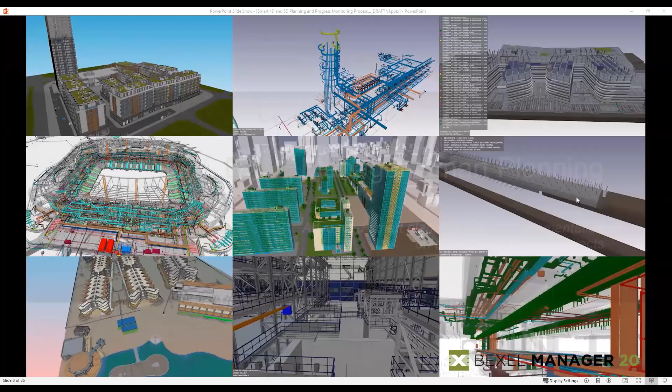Maybe the plants and the metro projects, tunnels are slightly different because some of the zoning is done in a different manner, and of course the methodology for construction is a bit different. In this case, we are going to talk about data integration and metadata checks. So Bexel Manager is IFC certified by buildingSMART.

We fully support IFC import and export, fully support also BCF, and in those data checks you will see how you can literally, based on data requirements and data specifications, integrate the requirements into Bexel and automatically perform various data checks. In this case, we are going to talk about Excel as a source of the rules, but also JSON, which is

literally a month ago, we within buildingSMART discussed information delivery specification, published the first document for JSON, and we immediately integrated this. So we hope that the other solutions will also follow us and use this JSON. And not just hope, but we already know that there are some others. So it will literally allow us to use the data checks from Bexel in any other application, or conversely, to use data checks from other IFC solutions in Bexel. So it really helps the users to be much more flexible.

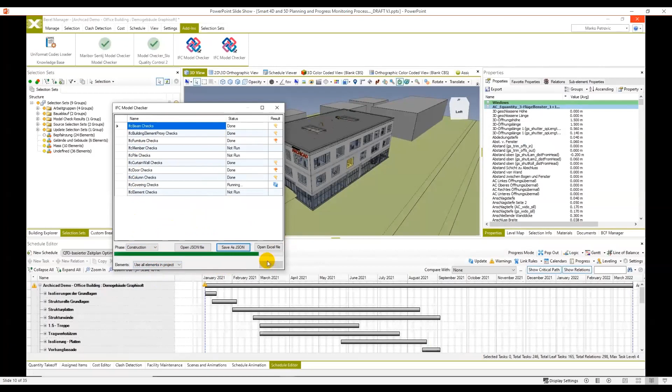Of course, essentially why we are developing this is that we can load that checklist, choose the phase of the project, let's say in this case the construction phase, and run the data check for all elements or just particular elements. And in a couple of seconds, you see that all selection sets are generated, which is fully customizable.

And you can on the left-hand side see all those checks when the check is performed, and you can easily, in this case by using BIM Collab as a collaboration platform or file-based BCF, automatically send them to the designers and other stakeholders on the project. So essentially they can see which properties are missing and so on.

Why this is very important, and why we always start with clash detection and data checks, is because otherwise, if the properties are not there, let's say we can calculate the areas and volumes of certain cost items, but maybe properties are not defined. Or let's say we can create the schedule, but building levels are not very good, or any other property. So in order to start further analysis, we need to first check if the models are okay.

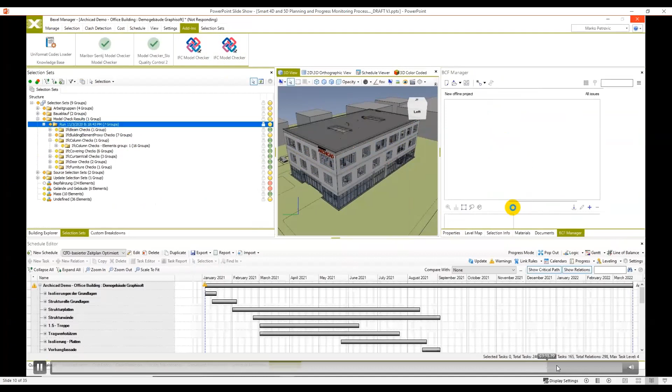And I have to say that just this feature helps a lot, especially designers. There are some projects where literally months and months of manual work of engineers are now optimized by using this flexible data check system. So this is not just related to the properties. It could be much more complex in Bexel Manager. So let's say we can check if the windows are hosted by walls,

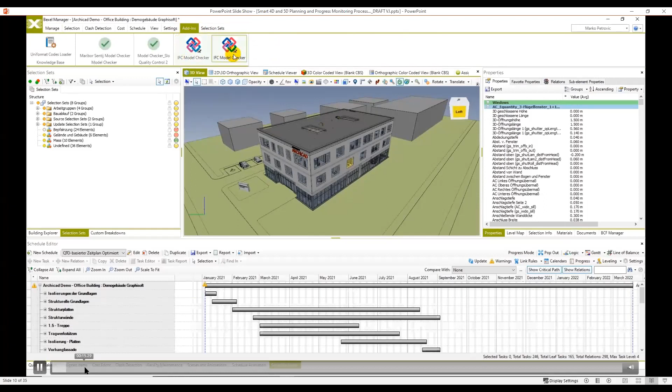or we can, as you will see later, combine the cost schedule information with IFC. So very interesting analysis can be automatically done in Bexel. So as you can see now, the user can just log on to the cloud and send this to, in this case, BIM Collab. What is also very important is the ability to move forward with the data checks.

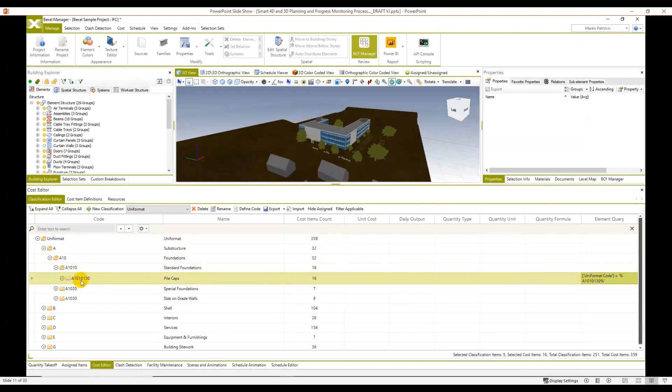When certain data checks are defined, what is also very interesting is that based on any knowledge base we already have, we can teach the system how to automatically enrich the model with new properties. So in this case, let's say there are uniformat codes, and this is Excel. As you know, Bexel is very open, so you can easily import and export data in any open format. So now from Excel, you're loading a cost database. This is not just cost information, you have all resources defined, but what's very important is you have formulas and queries, allowing Bexel to automatically create cost estimation.

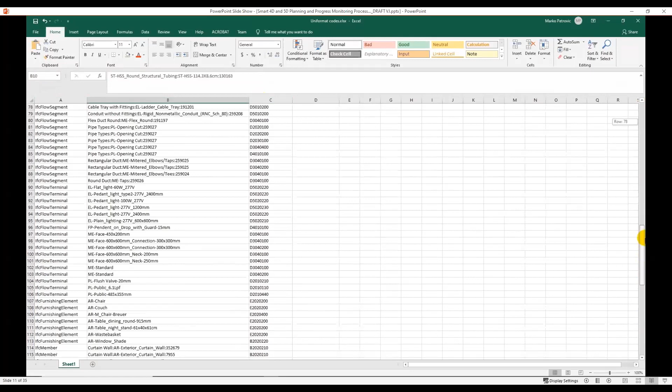So this is much more than just a simple cost estimate. The problem in this case is that certain properties like MasterFormat or Uniformat are not properly defined. With some additional simple add-in, we are loading a knowledge base which tells us which code has to be attached to a certain IFC entity and object type. If we use this on one project, we can easily use it on any other project and enhance this database. This is just a simple example - this could be much more complex and additional properties could be added.

So the workflow is the following: you just load this uniformat code loader, so even if the designer hasn't done this before, it automatically attaches the codes to each single element. Then if you have the cost databases, which in this case uses uniformat classification, you can literally in a second perform auto-assign and calculate the cost. So now you choose auto assign cost items, click OK, and when you do that, you automatically have the entire cost.

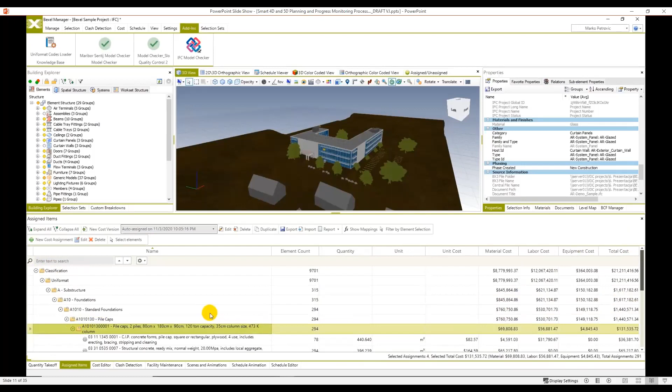So the workflow goes like this: you load IFC files, you don't have properties, you don't want to spend so much time manually working in Revit or any other tool. So what you are doing is loading the cost information and properties directly using this small add-in called Uniformat Codes Loader. As you know, you can develop those add-ins - there is huge documentation on our website and Bexel user area on how to do that. Our experts and developers could help you, and the entire process is straightforward and could be reused on any future project.

What is also very important now to talk about is efficient use of available data. So what is the point at the moment? Designers spend so much time to properly develop elements, categories, object types, families, buildings, everything, and we unfortunately do not use this efficiently in the construction stage.

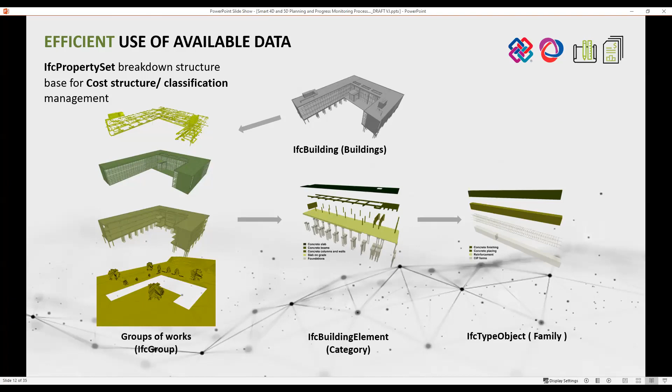So as you can see here, for example, for zoning and planning of the project, we could use IFC group, IFC building element, IFC type object - literally use all the elements and properties we have in the integrated model and automatically create very interesting analysis later. So you have this very interactive system in Bexel, and you'll see how you can literally create any cost breakdown structure, any classification based on the needs. The system is very flexible and can handle completely different projects.

You see how, by using properties which are already defined, you will have the full preparation for the cost structure, and later you will use it in the methodology. So how the system works - in this case we are loading just 3 IFC files. This is an Autodesk Revit sample project, so we are using IFC.

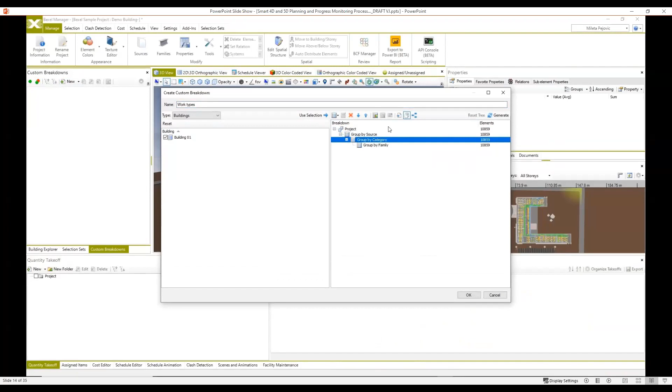We also have a direct link with Autodesk Revit, so an add-in. We are now creating, based on those models, a custom breakdown structure, organizing the elements by source, by category - this is a quite small project, let's say 11,000 elements. Bexel can deal with much larger projects, as you'll see a bit later. And now when you click OK, the system creates a custom breakdown structure where on the left-hand side you can see a color-coded system. So the elements are organized according to the source, then according to the category, and in this case according to the family, or in IFC terminology, IFC element entity and IFC type. So in a couple of seconds, you can create a custom-based classification, color-coded system, so you can visually check if everything is done properly and okay.

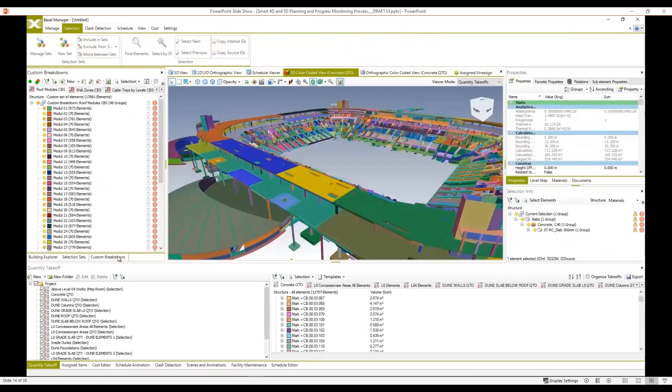This is a bit larger project, a football stadium for the next World Cup, and again custom breakdown structures are used, and that's how, for example, phases of the steel roof construction are analyzed and defined, and of course could be used later for 4D and 5D simulations. This is MEP utilities organized in this case by building levels, so we can literally query and customize the breakdown structure in the way we want.

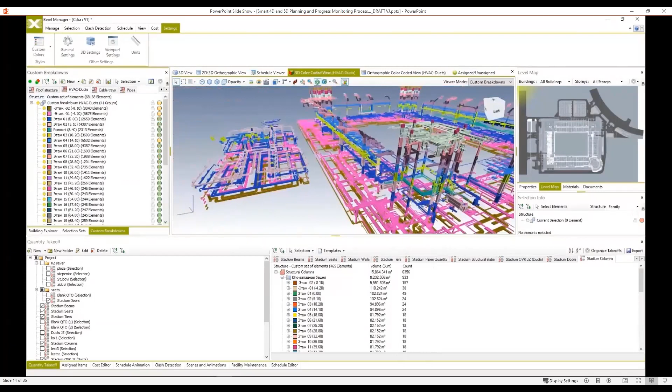This was for the previous World Cup, the project in Moscow. So we have an idea that Bexel is used for all World Cups, and this is the analysis done for the football stadium in Moscow.

Let's move forward. Now the idea is how the cost system is developed, what is very important. Of course, all those videos will be sent to you, and webinars. So what is very important is that Bexel is a very flexible platform.

In this case, you can use Omniclass, Uniformat, Masterformat, Spanish BC3, German DIN 276, CoClass, hopefully one day the standard in Europe, NRM2 or SMM7, NATSPEC, Australian based, and you name it. So literally Bexel is very open in this way.

And in this case, you can see that exports could be in BC3, which is Spanish and also a standard used in Latin America, and GAEB, which is the German cost standard.

So when the BIM cost classifications are defined, and every item has cost information, but also a BIM query and formulas, Bexel could automatically generate the cost, and then by using intelligent construction schedules, create very accurate 4D and 5D simulations. You can compare different versions, export to Power BI, and we'll show you a glimpse of that today as well. So this is one way how you can organize the methodology.

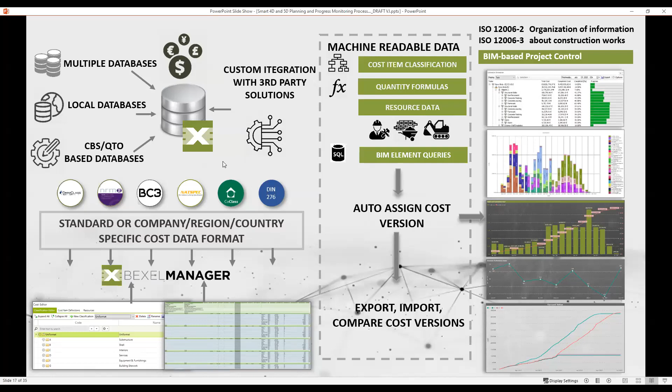Just to mention that Bexel has a desktop and a cloud-based system, so you can use our common data environment if you are working in a team, or if you are a single user you can use a desktop application. Sometimes, especially when dealing with a very large quantity of information, it is very good to have data on your desktop, because cloud-based solutions are very good, but sometimes performance struggles a bit, especially on large-scale projects.

What is also important is that Bexel could be hosted on any premises. It could be Amazon, could be Azure, could be our server, but also, what is very important, client servers and client premises as well.

So there is a question. Can I put... yes, maybe you can. The question is about Dutch standards.

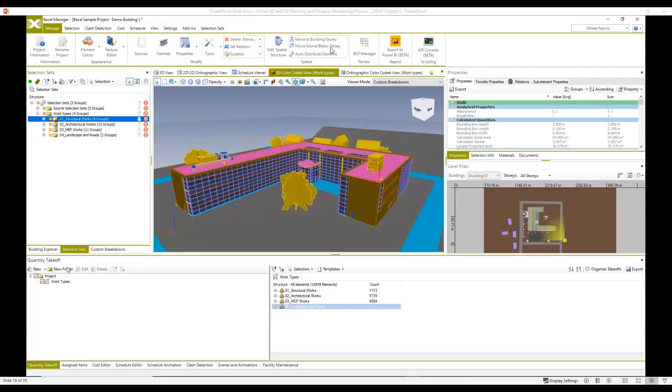There are our partners in Netherlands, and I think they already integrated some work done with Dutch standards. I saw on one presentation recently in a competition in Netherlands that they used the Dutch standard and classification integrated into Bexel Manager. What is very good is that it's done by the experts in Netherlands, so we didn't even know what they were doing. This is an open, flexible system that allows users to really do everything by themselves.

So this is the way how the quantity takeoff is generated. We chose here different selection sets, so architectural works, structural works, and based on that we automatically create - group by category, group by selection sets, which are previously defined. Then the third parameter is family, could be building level, any property you have in the system. And we are adding here properties like volume and area, and the system automatically creates the quantity takeoff.

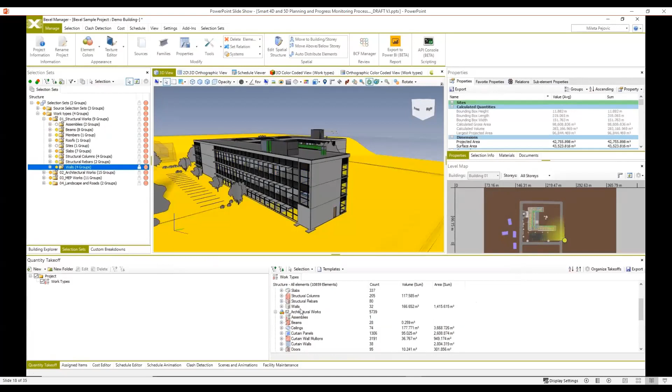So when I isolate any of those elements, I see visually where those elements are in the project, and I see all the quantities. Of course, this is not enough for professional bill of quantities, but Bexel could be a good basis for this.

There are a lot of elements for which you need more specific formulas, such as reinforcement, formwork, and so on. Based on this quantity takeoff and the defined outline level, which could be customized in Bexel, you can literally in a second automatically create a cost classification. And with this cost classification, if the user has defined even the cost in the BIM family, you can automatically have the cost as well.

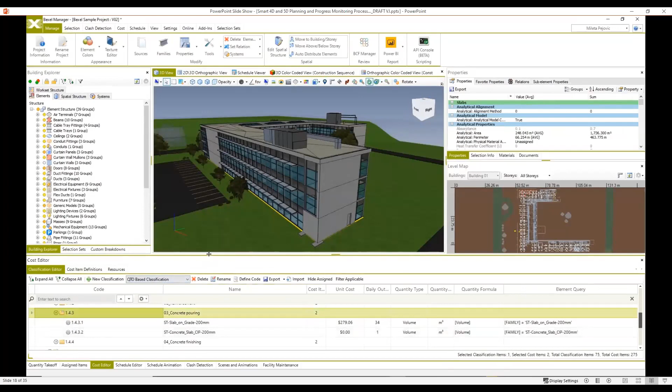So with this cost classification automatically generated, and if you add certain costs or resources, you can have labor, equipment, materials - these are various cost databases used. I think this one was from Spain.

You can literally change the formula, so it's not necessarily just a property. You can set, okay, I will include a waste factor, or for formwork use the property reinforcement as the density of reinforcement. And when it's done, the system can automatically create a new cost version.

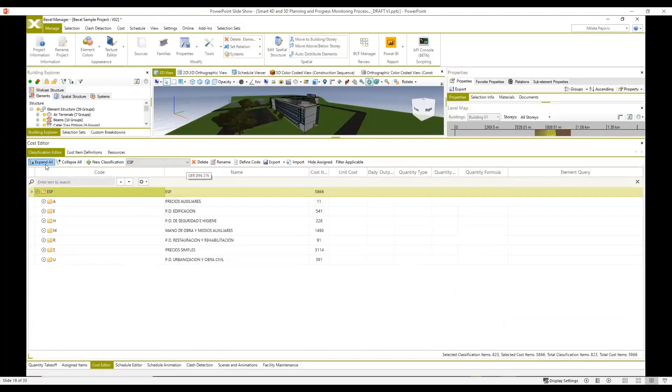You will see now that those cost versions are very, very detailed. In this case, you see Swedish AMA standard, the German standard, Spanish classification. So as you can see, you can use really various classifications in Bexel Manager. We hope in the future that it's going to be a bit more unified, because this is part of digitalization, so standardization is very important.

Now when we have this automatically calculated in Bexel Manager, whenever we isolate certain elements, we see just the cost of, in this case, architectural works. Or opposite, when we select the elements in the BIM model, in the cost items, we can see to which elements those classifications are connected.

This is another classification my colleague will later create, based on this IFC-based classification, which is quite innovative again. Why? Because you can use this literally on every project in every country. So if you are a multinational company, you can easily deal with this, and the calculations and analysis work very well because they are based on ISO IFC standard.

So now this is an example of how you can define the properties, change the volumes for the quantity types, units. Usually it is predefined, and just maybe for new cost items this has to be enhanced from time to time.

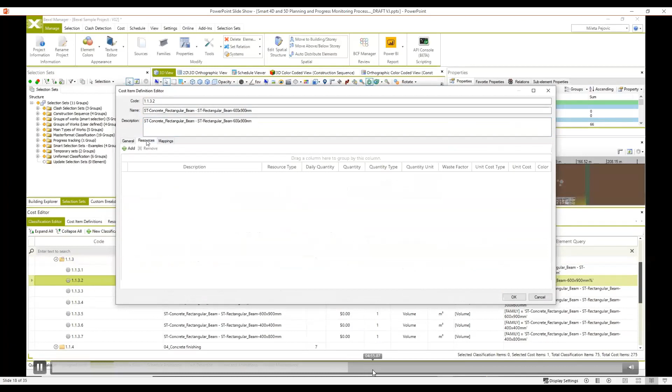The benefit of the Bexel integrated system is that whenever I change the price of the concrete, let's say because it is increased due to change of the market, it automatically changes the cost of all cost items related to it. So that's why it's important to properly have defined cost databases.

Then you can use what-if scenarios, all bids are happening, and if somebody is giving you different prices, you can see how the prices are differentiating among each other.

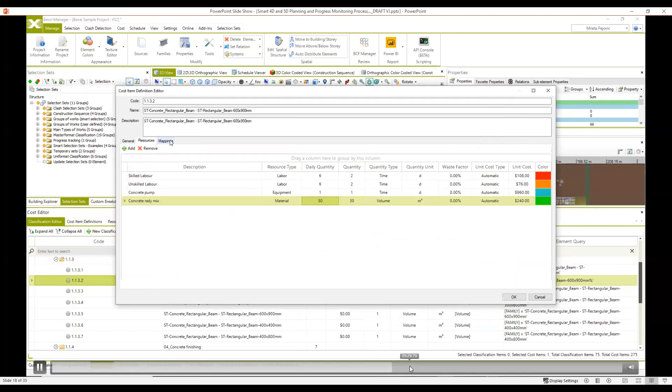Just to move forward, this is how formulas are defined, and when it is done, you can literally assign those elements to the project and see how the total costs will be automatically calculated, because again we are using quantity formula and element query for this.

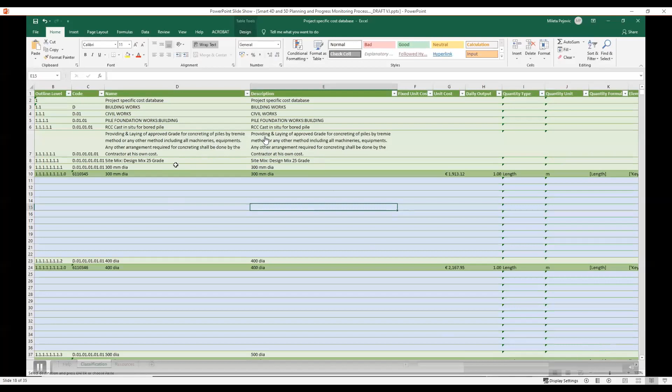Just to move forward, this is an export into Excel. It's a fully open approach, so all cost classification you can import and export into Excel or any other format, so you can reuse it.

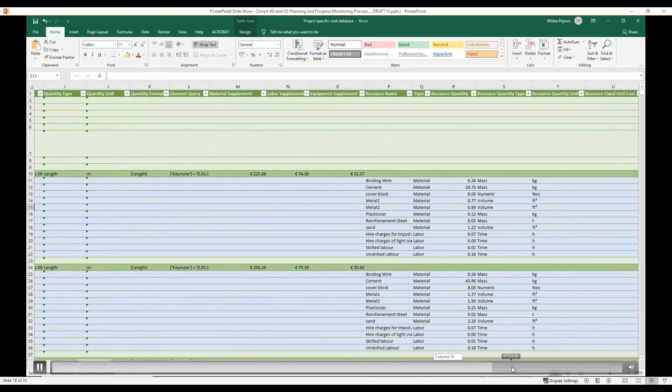There are very large contractors around the world which use this for integration with SAP system or other ERP platforms. This is very important, because we know that we are not going to solve all the problems, and collaboration is of course very, very important.

So just to see, there is okay, no questions, great.

So this is the way you are importing and exporting cost information into Bexel, and when it's imported, you can also automatically calculate the costs for all elements.

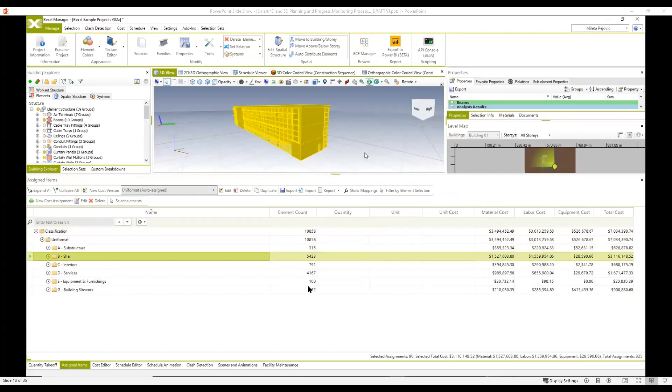As you can see now, this is not the QTO, but really bill of quantities with all cost items which don't necessarily exist in the BIM model. So you have a cost of formwork and reinforcement, although those elements don't exist in the BIM model, because you apply the formulas to other elements which exist in the project.

Let's now just move forward. What is also very important to say is that we are supporting 5D. This is an open standard for cost IFC import and export. We believe this will help for collaboration with other platforms, so it could be a common exchange format based on IFC for exchanging cost information between different platforms.

So you can have a cost version or schedule. Also here, what is very important in this cost schema is that it is always related to the element. So this is not just an Excel spreadsheet, but there is also a rule-based system which allows users to know actually to which elements the certain calculation is made.

Okay, costs which are not in the project, how do you... okay, QTO takeoff does not show the levels as per spatial structure, also assigned items. Even the dates in Excel are not in the date format, the small correction is very much needed. Okay. QTO does not show the levels. Okay, to be honest, could somebody clarify this question?

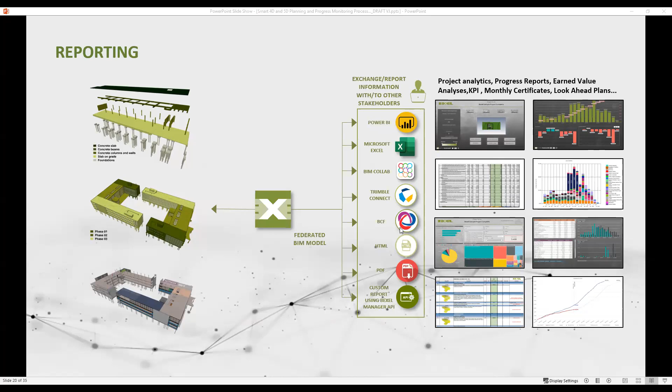Okay, having all this IFC, can you generate the schedule directly? Yes, yes. So we will show you today how this could be automatically generated. I just wanted to show you one example, but maybe I would ask Alex to continue now with the explanations, and then at the end I will show you an example with the Power BI reports, but the progress has to be entered and the schedule generated. So Alex, could you please?

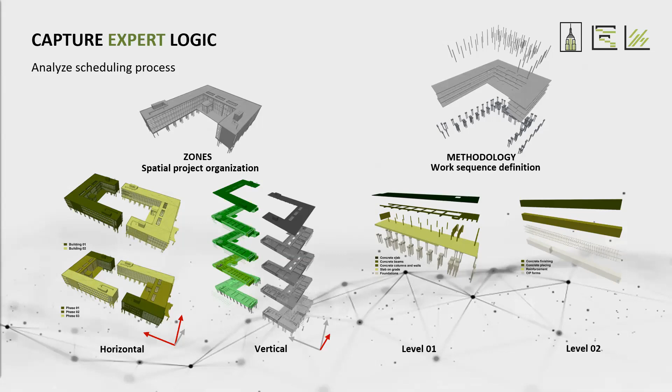And besides that, you also had to do what we call functional organization or work sequence definition. You always had to define which type of works starts first and which one follows, and define the relations between them. But we were thinking if there is a better way to define these essential organizational levels for the project. So we came up with this idea.

So instead of manual schedule creation, where you create every task in the project independently and define relations, we were thinking: what if the planner only defines these levels of organization, and an intelligent scheduling matrix or computer algorithm actually generates the schedule from these rules defined by the user.

So our basic idea was this: what if we produce a software architecture that allows you to define, for instance, first the buildings on your project. In this simple example, you define the relation between two buildings, when the first one starts, when the second one starts. Then you define the order of work. So you just say, okay, I'm going to start with the site preparation, followed by the foundation works, followed by the slab on grade, and so on.

Then you go to the next level of organization and say, okay, within every concrete work, I'm going to have first formwork, then install reinforcement, then pour concrete, and then do concrete finishing. On the next level, I'm just going to define the vertical levels of my project, starting from the lowest floor to the highest. And then within every floor, I separate it, in this case, into 3 different phases, and say when I finish the first phase, I continue to the next one.

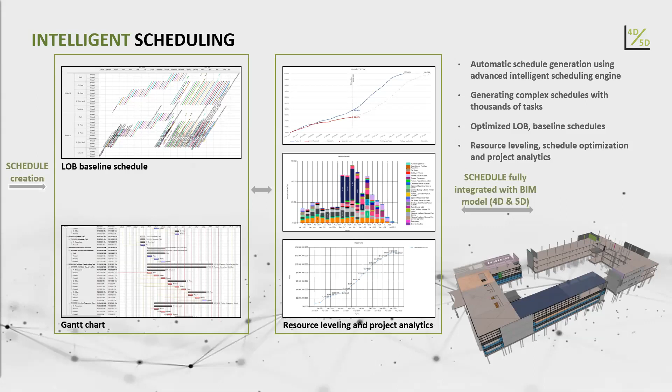Besides that, since we started our schedule creation within the BIM tool, we right away get a schedule that is linked with the elements and completely integrated with the information within the BIM model. So as you create the schedule, you have numerous analyses available, so you can evaluate the schedule, optimize it and fine tune it. You can see the progress forecast for the whole schedule, the resources used, cash flow, the cumulative cost S curve. Everything is available right away, and of course 4D/5D construction simulation.

So after we did it, we tried to see if there are some limits in applying this logic, and we found the whole system to be very flexible. We tried it on small projects, large scale projects, infrastructure, housing, even hospitals and stadiums, and it works pretty well because these types of construction follow pretty much the same schedule structure. Of course, you have differences in methodology and different sequences of work for different types of projects.

But let's say for this example, this is the project that was the main showcase for our submission for this year's buildingSMART Awards, which won the innovation category. If you look closely at this project, which has more than 20 buildings, we only had to define these six levels of organization, and with this scheduling matrix we were able to create a schedule of more than 10,000 tasks and relations altogether. To do it the traditional way would take months, creating every single task and relationship. In this case, it took us a few working days.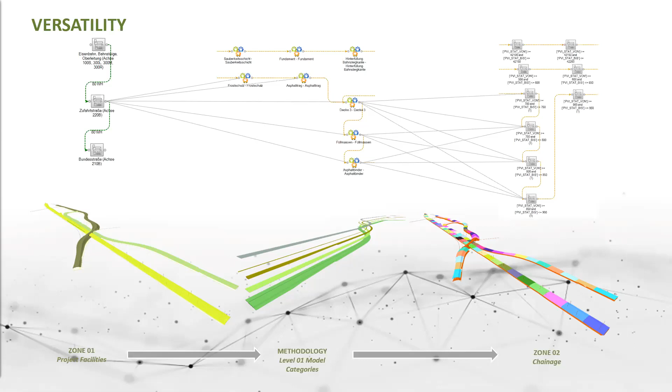I'm also going to show you one more scheduling matrix. In this case, it's an infrastructure project. We used the same logic, only changing the spatial organization a little. We didn't have vertical spatial organization; we just added chainage, the sequence of the sections of this linear infrastructure project, and we got in the same way a very complex and detailed schedule using the same principles. So to sum up intelligent scheduling, we can see this workflow.

Actually, you just have to define spatial organization of the projects through defining the zones in our software. You just have to define construction methodology by connecting it with the project cost database. Then you're going to just assemble all together into creation template and to combine it.

So why is that important? It is important because you can reuse these defined organizations into following projects. So you have very intelligent knowledge management. Then you can just auto-generate schedule, fine-tune, and evaluate it through extensive analytics that is available. And then you just have fully integrated 4D, 5D BIM analysis in your Bexel Manager model.

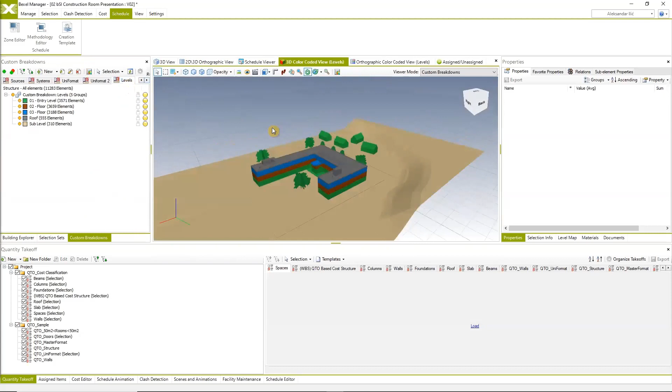So I'm going to just show you briefly on this sample case how it is actually done in the software. So as I said, all the information for the spatial organization and the methodology is actually already available in almost every model. So you always have information about the levels, more or less. Veljko just explained how you can utilize the available information for the cost database. So we're going to just rely on this existing information and quickly and very easily define schedules.

So in this case, first, we're going to define vertical spatial organization. So basically, we're just linking building stories to what we call levels zone and define relations between the stories. So we just say finish-start from the lowest to the highest.

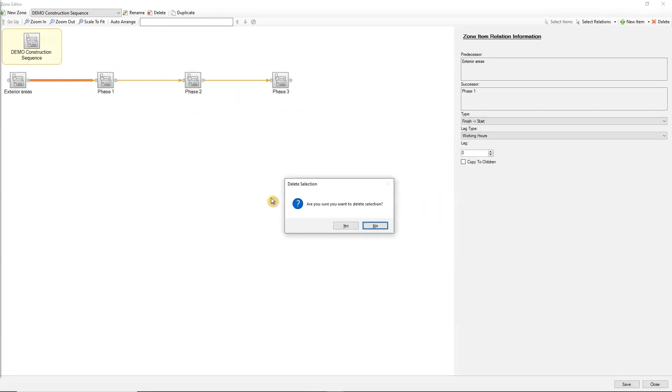Then we are defining the next level of the spatial organization. We are defining the sequence of the phases. So we're not going to execute one floor at a time. We're going to separate it on 3 different zones to have more optimal resources use. And here we're just defining the sequence of these phases.

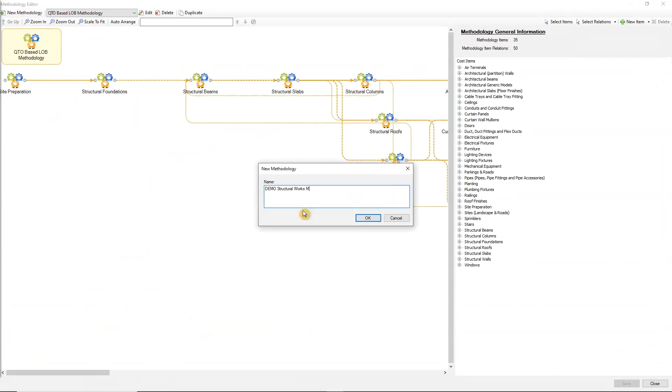Then here we're going to just demonstrate creation of very simple project methodology only for structural works on this project, because we don't have time to demonstrate this complex one for all works on the project. So you just have to link actually cost items from the cost database, which basically describe your works, types of works. And you see, this is a very intuitive sequence that says site preparation, structural foundations.

After that, you're going to execute foundation beams, slab on grade, and after slab, you're going to start with the columns, walls, and roofs. Of course, you just have to use copy to children relation, so you can translate these relations to the lower levels of organization of your schedule. You're going to use constructive relations that will prevent illogical behavior. That means to start getting, let's say, beams on the second floor before you finish beams on the supporting elements, columns, and walls on that floor.

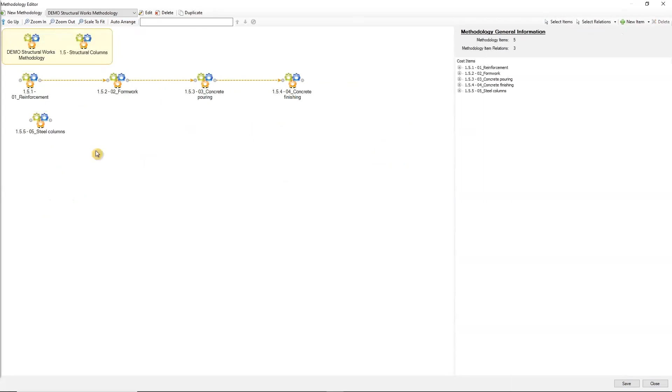Then here you can see definition of the next level of organization. That means that within every main type of work, you can define sub-activities as well and their sequence to have even more detailed schedule. You see that within every main group of work, you have subgroups defined. So after that, we're just going to go back to the zones and define constructive relations to be applied on the levels to prevent this illogical behavior of the working sequence.

We're going to assemble creation template by using the two levels of the methodology that we defined. So this was the first 7 groups of works. Now we're going to include the next level where within every main group we have sub-activities. Then we're going to define vertical spatial organization, horizontal spatial organization, and we have everything ready for schedule creation.

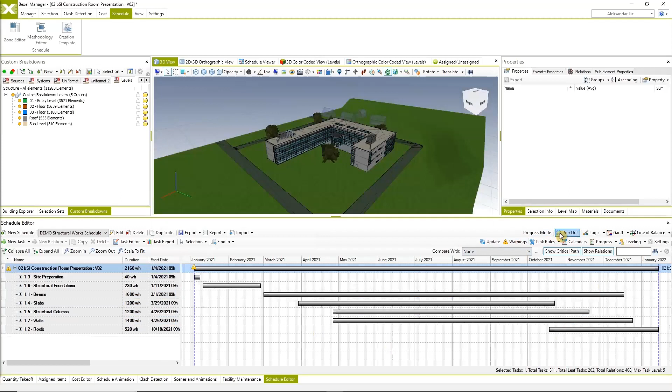So creating a schedule after this is defined is very simple. You just have to create a blank schedule. You have to assign corresponding cost database, so the cost information will be updated right away and integrated into schedule. And then you just have to apply the rules that we have just defined through zones and methodologies. So there it is. You have completely defined schedule with 311 tasks and 408 relations.

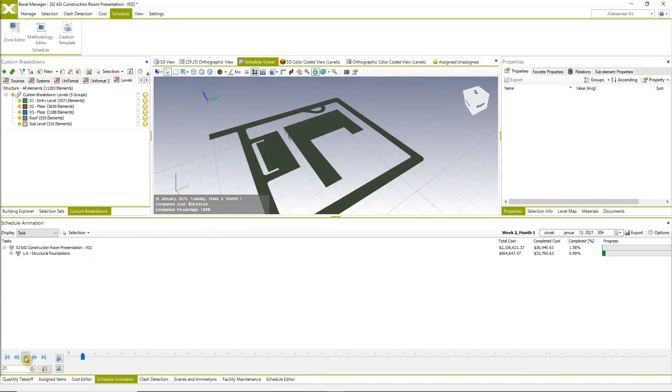You have line of balance view, you have Gantt chart, you have schedule analytics, so you have cash flow, you have cumulative cost, and one important thing is that right away you have schedule animation as well. So basically, as soon as you create your schedule, you can easily evaluate it. You can easily evaluate if the construction sequence is logical, if the parameters of the schedule analytics are well, and you can further fine-tune it to get really functional master schedule for your project.

So I'm just gonna speed up a little bit this video. So I'm gonna just show you here also the more complex schedules that we have developed that actually include all types of works within this model. So you can see that this schedule is much more detailed.

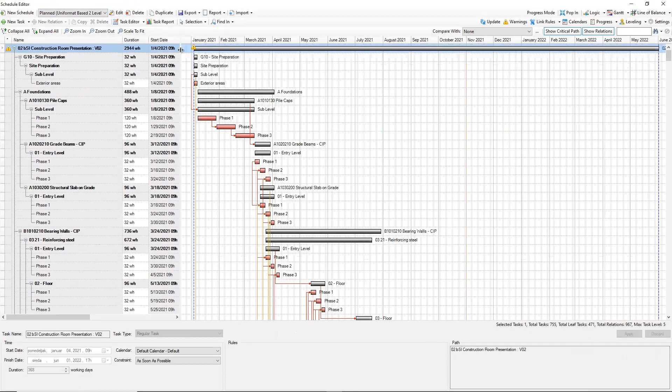You can see that in this case, we were using Uniformat cost database with integrated resources. So you have even more extensive analytics within your schedule. So besides cash flow, you can see the labor and equipment analytics, and you can further optimize it through resource leveling. And you can see that this animation is even more complex because we just had more types of works defined.

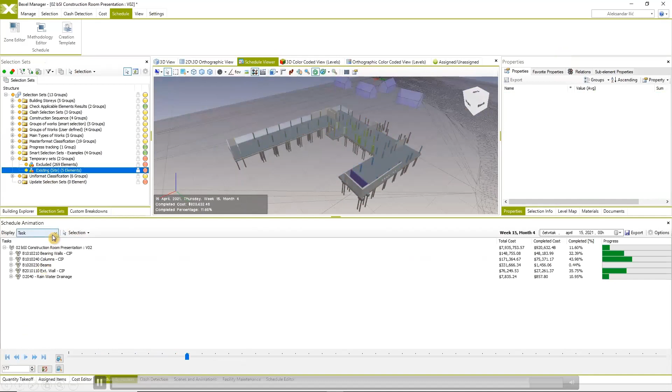So basically that was it for the demonstration. For the time limits, we will just continue further. So after we have defined the schedule, the next step is progress tracking. So when you define schedule, you have to input progress.

What is important about schedule in Bexel Manager is that once it is actually active schedule, what we call it, when you input progress, the schedule will recalculate all the following activities. So if, for example, you had certain task that was scheduled to be executed in 10 days, and you put the information that it was actually executed in 15, that task will be extended to 15 days and all the works that follow this task will be moved ahead. So you have realistic schedule and you have realistic forecast based on the progress input.

Also, I'm just going to tell you that here you can see that there are three main different workflows to update the progress input in the schedule. So you can put it directly in Bexel Manager, just marking the elements or percentage of completion, whatever way you like to update your schedule. You can use it by sending BCF file of the look ahead plans to the surveyors on site, and they can return you back the real progress schedule via BCF file. You can import it and progress update.

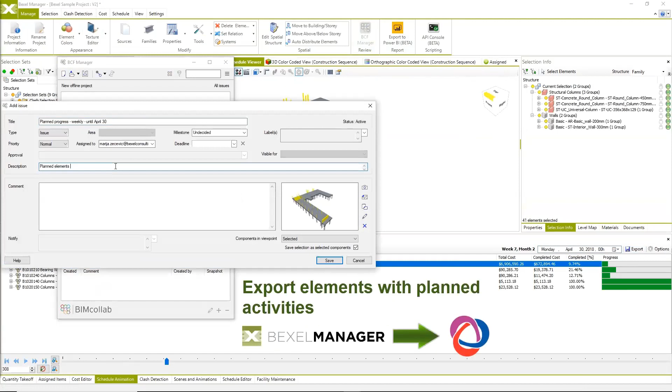Here we're going to just briefly go through the process of progress update. So basically here the user has to prepare look ahead plan. So it defines the period for which the look ahead plan will be done. So within schedule animation, he can simply produce selection set with the elements that are planned for, let's say, next week to be executed. Easily with the BCF manager, he can just create BCF file from this selection set, send it via any BCF supporting application to the surveyor on site or to the contractor.

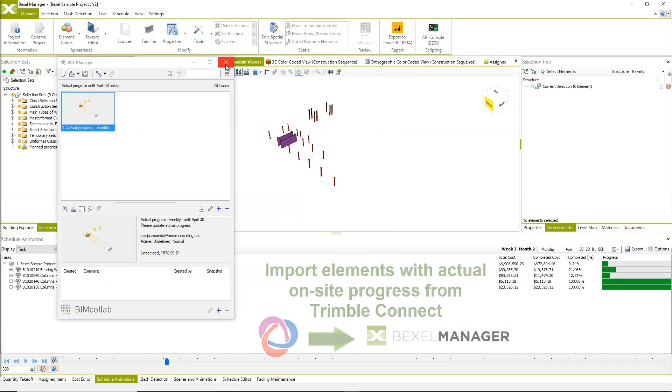Contractor can open this BCF file, select which elements were actually executed, create another BCF file with the real progress data in this case, and it can send it back to the project manager to be imported into Bexel Manager like this. So basically once our project manager imports the BCF file back, he can just create another selection set and use it to simply import data into actual schedule.

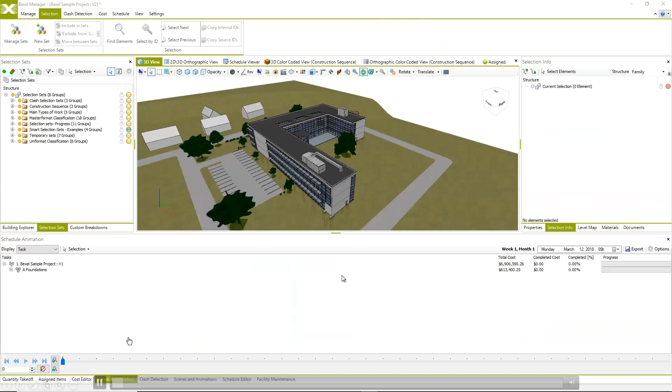And after that import is completed and approved, he can just simply evaluate the schedule analytics and see the differences. So he can compare planned baseline schedule and the new actual schedule with the progress information included. So besides this, there is also even more advanced workflow that includes smart API script that actually can produce automatically look ahead plans for defined period of time.

Sorry, this is not the right slide. I'm sorry for this. So the API script that can automatically produce look ahead plans for defined periods and just automatically create selection sets for the certain period of times, for the certain intervals, and all the elements could be sorted by activity. So you have opportunity to send different activities to the different surveyors on site.

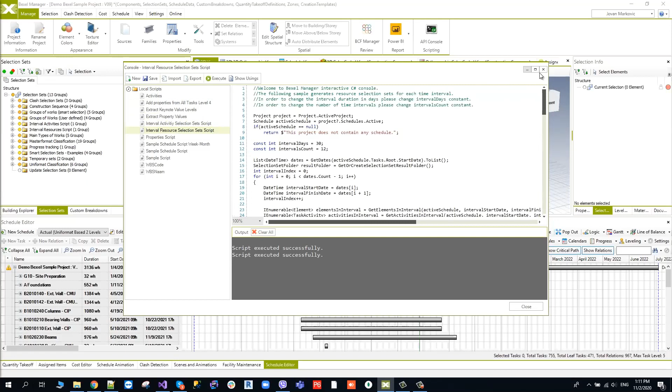So if, for example, you have one surveyor for the architectural works, you're going to only send him look ahead plans for the elements that are part of architectural activities. And if you're going to have the one for the MEP, you're going to do that as well. So this system actually allows you to automate the process of progress input and to significantly reduce workload on the surveyors and project managers that are managing progress, and also get much more detailed information about the progress, and with that also more precise analytics and better project performances at the end.

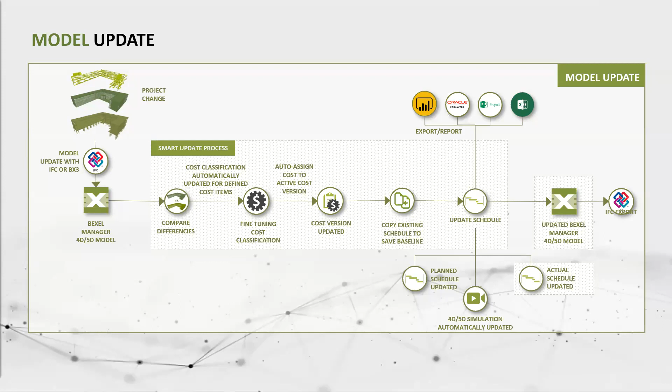So the next workflow, very important, is model update. It is great if you can quickly produce your schedule, if you can smartly manage your cost data, if you can input your progress data easily. But if you have change in the project, and that happens very often, and you cannot update this analysis, it doesn't help you much. But within Bexel Manager, things are pretty organized regarding this update process. So you can simply update your model, in this case with IFC files, only for architectural and structural works. So you can partially update it because this model was assembled from 3 sources.

You can simply choose which source you're going to update. So you just match the sources that will be updated. You choose what will happen with the missing elements, the elements that were deleted. So here we're just choosing to keep the elements so we can track the changes within the model. And it's going to be demonstrated later how it works.

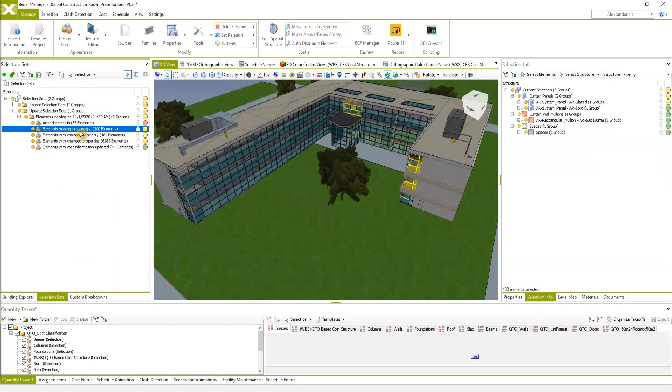So basically, after the model is updated, you can very simply analyze what were the elements that were changed. So in this case, you see that to our sample model, we added some terraces. So the architectural and structural model was slightly changed. Here you can find the automatically created selection set, which will show you which elements were added, which elements were deleted, which elements stay in the model. They have just changed geometry or changed some properties or changed some cost information, so you can easily track the changes.

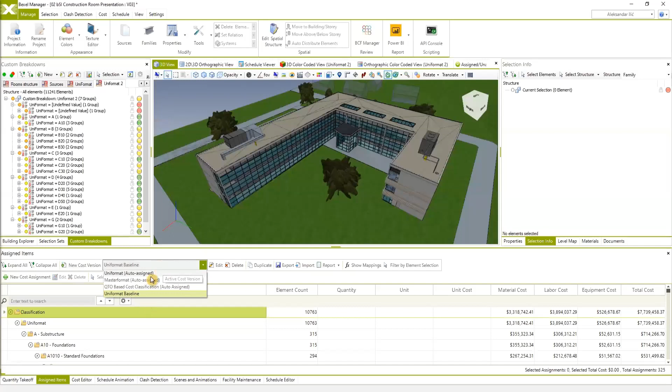So after that is analyzed, now you can check the cost information. In the cost information, you see that added elements are not included into this analysis. It is the same for the schedule as well. So you see that newly added elements are not part of the existing schedule. So should we do the analysis from scratch? Of course not. In this case, with the simple update process, you can update these analyses and get new elements and get the new design within your already prepared project analysis. And you can even analyze the differences.

So right now, you just auto assign new elements to the existing cost version. Now you see that the elements are included into the cost version. You see the new price. You see the baseline cost database, and you see the difference in price is, in this case, roughly $60,000. So actually, the software just gave you the calculation of the cost difference between these two model versions or project versions.

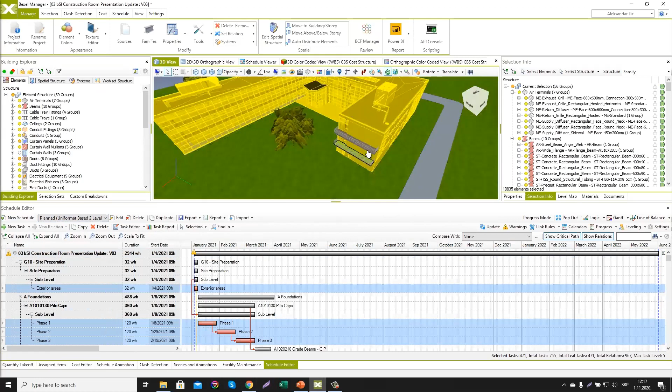So when it comes to the schedule, again, here we see that the newly added elements are still not linked to the schedule. So we're gonna just start with the update process. So first, we're just checking that the cost classification that was included is the one that we have just updated. So it has to be updated before you start with the update process. You just click update. The process is very simple, very quick. And right now you're gonna see that all newly added elements are part of this schedule that was created on the old version of the model.

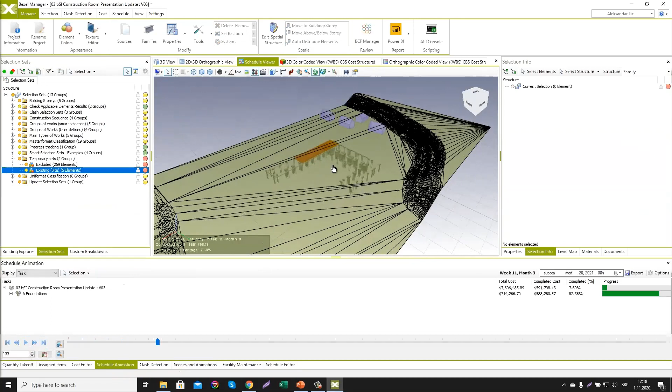We're gonna just test it in the 4D, 5D animation. So we're gonna update the animation with the newly updated schedule, and we're gonna simply see that the elements that we added are now part of the updated animation. So you see that the terraces are appearing in the corresponding sequence of work. Okay, let's move to the next slide.

Well, for the end, this is the slide that shows the IFC MVD schema for the exchange of schedule information within IFC through IFC export. So here you can see IFC property sets that could be exported from Bexel schedule. And we find this very important for successful interoperability within the OpenBIM environment.

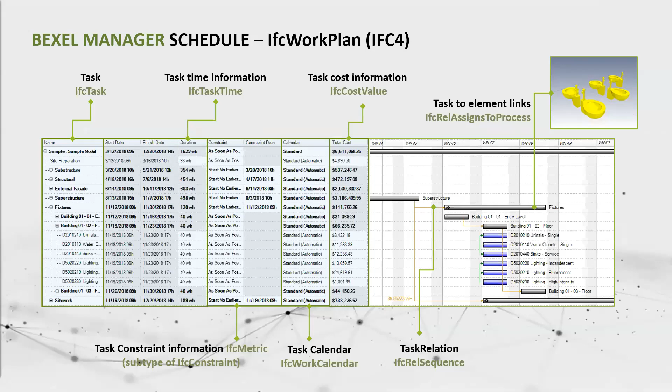So here we're going to just go quickly through the process of IFC export. So you can simply define to which IFC you're going to export it. You can customize your export, click OK, save the file, and it's as simple as that. The file is quickly exported and you could exchange it with other OpenBIM applications.

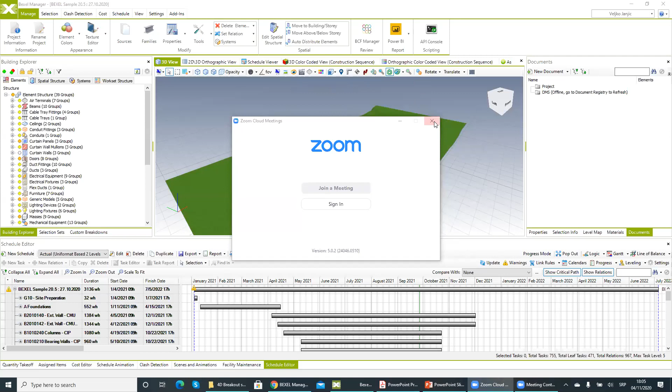So first I would like to answer your question. The question was, can we use different methodologies for different parts of the project? So yes, this could be done. When you have the methodology defined here in the scheduling part and define the template, you can, let's say, have one cast-in-place building and the second one precast. And so you can have slightly different methodologies, and when you are creating a schedule with a wizard, choose the option for the building, just go to the wizard.

Okay, when you create a new schedule, if I had two buildings, I can choose for the first building one task, and for the second building I can choose a creation wizard and say, okay, I will use one methodology for the precast and the second methodology for the second building, and you will have different methodologies for different parts of the building.

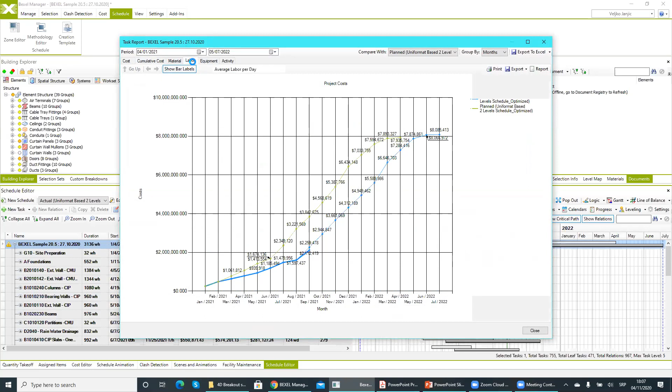I want to show you when you have actual progress, when actual data enters the site, so I can compare with planned, as Alex mentioned. I can see baseline cost, total cost, earned value, so I know literally where I am in the project, and I can see this in the report - cash flow, cumulative S curve - so I see I'm a bit behind in the schedule.

Also very important, in this case you have a direct export to Power BI, could be basic or advanced, you can customize it, you can develop your own. As you know, Power BI is very open, and I'd like to show this Power BI example from the demo model.

If you have our trial version, you can go to the Bexel user area, download all materials here in various languages - manuals are there. You have demo models, one of them is the model presented here - a Revit sample model. You also have ArchiCAD, and an infrastructure project, a very large project with 670,000 elements, to test performance on huge projects.

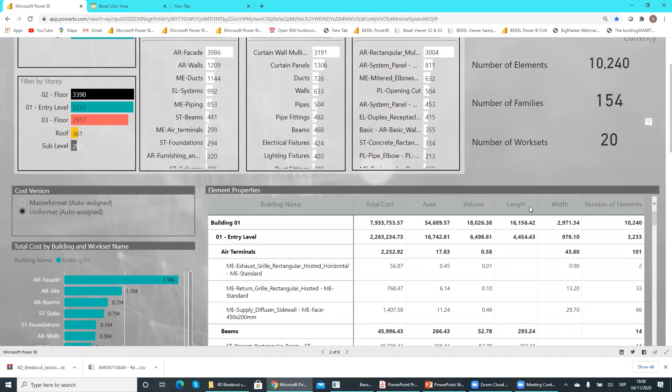So you have a lot of analysis here. One is Model Explorer, where I can literally see all the cost classifications, structure of my cost. Of course this is Power BI, so I can just filter to the second floor, first floor, and automatically see all the analysis.

There is also a clash detection view, where I can see all the clashes in the project visually - where those clashes are in the project, and see those numbers. Bexel is an integrated platform, very nice for project management.

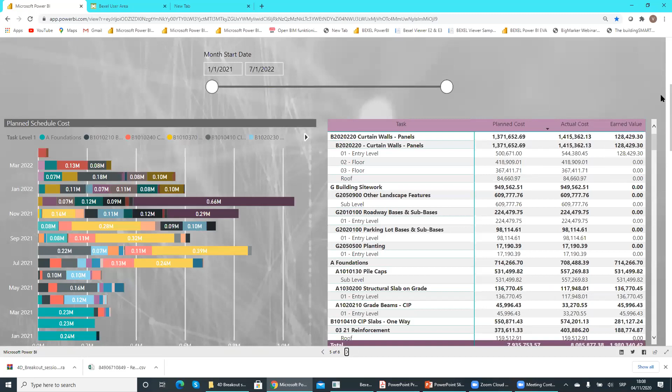I can choose a cost classification, structure of material, labor cost, drill down, filter this. What is also very important is the planned versus actual analysis - where I am in the schedule, what are my results, earned values, S curves, planned and actual number of workers and costs.

Maybe I had more workers than planned, but also the reason could simply be that the prices of certain materials go up, and that's why we're struggling on the project.

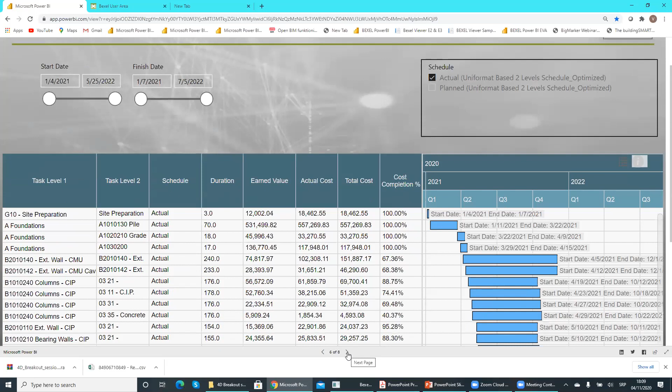You have Gantt charts where you can see actual or planned projects. Let's just go to actual, you can see it with all the data. You can share this with the client - our clients, usually project managers and owners, like this very much.

What is very, very important is a real earned value analysis - you see baseline cost, earned value analysis. It's much more complex than Primavera, because Primavera cannot store the information about when something happened on the site - it just knows the cumulative number. Bexel allows you this.

If you isolate a certain area, let's say foundation works, I can see S curves, earned value, and cost variance just for foundation works. What's very important is I can see how the cost performance index has changed - I spent more money than planned in the first month, in the second I was almost even, but in the last two months I spent less.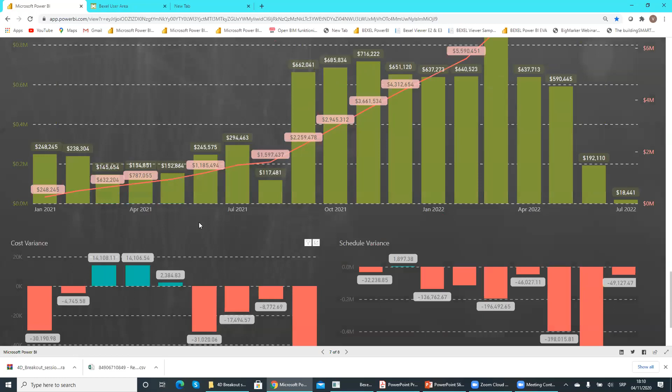So when you have all this data, you have schedule performance index and S curves for just one cost or for the entire schedule. With all this information, you can literally manage the project, organize meetings, know what's going on, know what the problems are.

What's also very important is to move to schedule performance indexes per resource. For each resource - material, equipment, labor - I can see what the works are on the site. If I isolate carpenters, I can see the costs and quantities of my carpenters on site, and how this has changed.

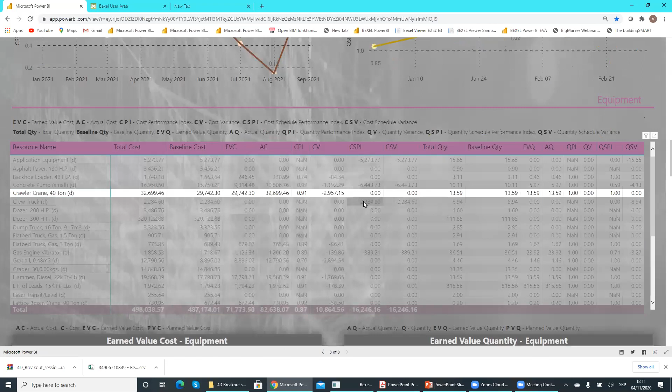So I know if the problem is that I'm paying much more for my workers or subcontractors on site, or simply their productivity is lower, because these are two completely different messages. The same goes for equipment - I can isolate a crane and see the same analysis for the crane or for materials.

So literally I have a system which can control the entire execution of the project. What's very important is that the entire demo is available on the Bexel user area.

You can even, maybe if you want, just ask in the chat how to do that. Let me see how I can do that. Alex, can you help me share this, or can you just screenshot this and share it? Okay, I'm going to send it to the chat. Don't worry, I will send it to you in the chat.

Do that? Yeah, yeah, okay. I will. Okay, so you can literally go and see how this demo works.

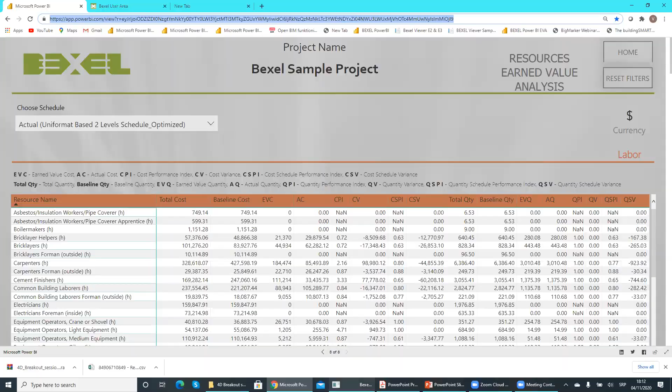If you use a trial version, you can just open Bexel Manager and try by yourself to export the information from the sample project, which is available on the Bexel user area. Sorry, we're a bit late.

To answer a further question, BCF export - I know that with BIM 360, BCF doesn't work anymore. Our suggestion is to use Bexel Manager on site. It allows you to organize progress and look ahead in a much more intelligent, straightforward way. We hope that in the future other tools will support BCF, but until that's done, you can use Bexel Manager on site.

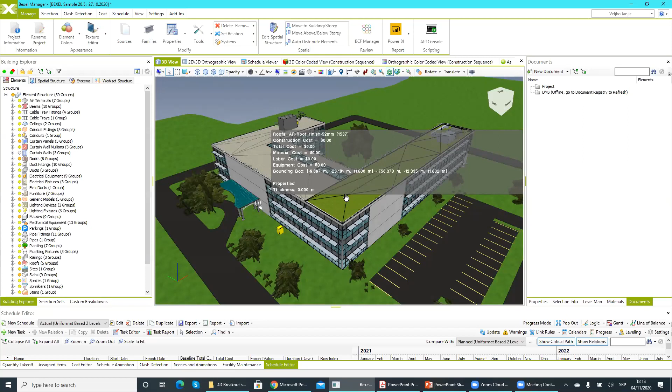We just wanted to demonstrate how you can work with other tools. Fortunately, there are now new tools which support BCF, so you can use any of those.

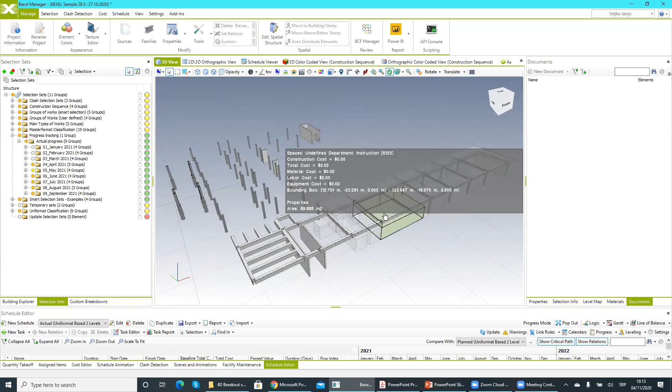What's very important is that it's not necessarily one single selection set, because I can say on certain elements I'm performing progress - for example, formwork on some elements, but just reinforcement on others. So these selection sets are not necessarily unique, and I can enter different data for different activities on the site.

Just another question - do you have a student version? Yes, we do. At the moment, in about 140 countries, we offer educational licenses. For professors and students, they're fully free for one year. The only thing you need is some confirmation letter from the university or a valid student ID, and you can use all these features.

There are a lot of master's and PhD theses done with Bexel Manager. Of course, the only limitation is that you cannot use it on commercial projects. So just go on our website and ask for an educational license.